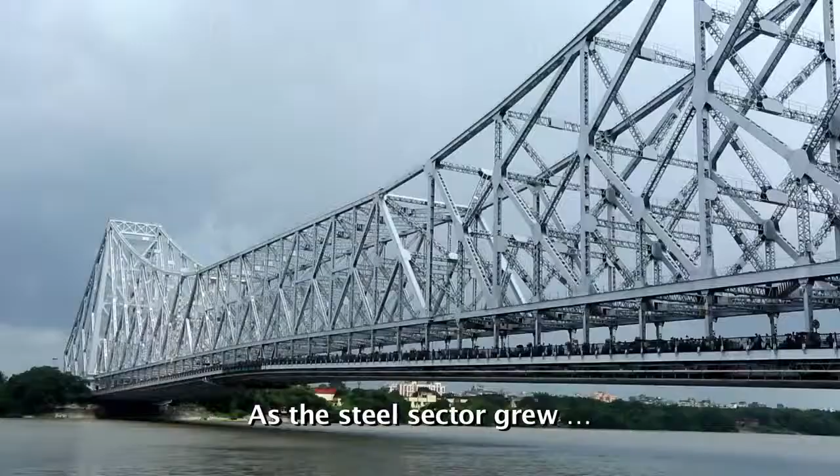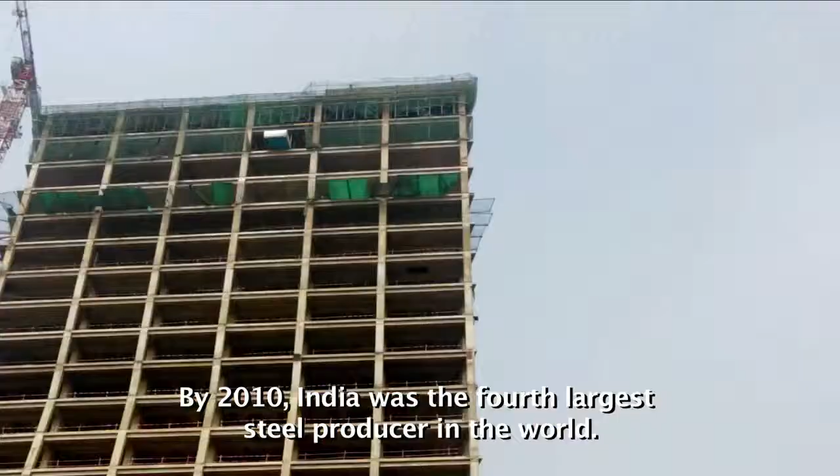As the steel sector grew, so did the nation. There's truly a bit of it in everybody's life. By 2010, India was the fourth largest steel producer in the world.

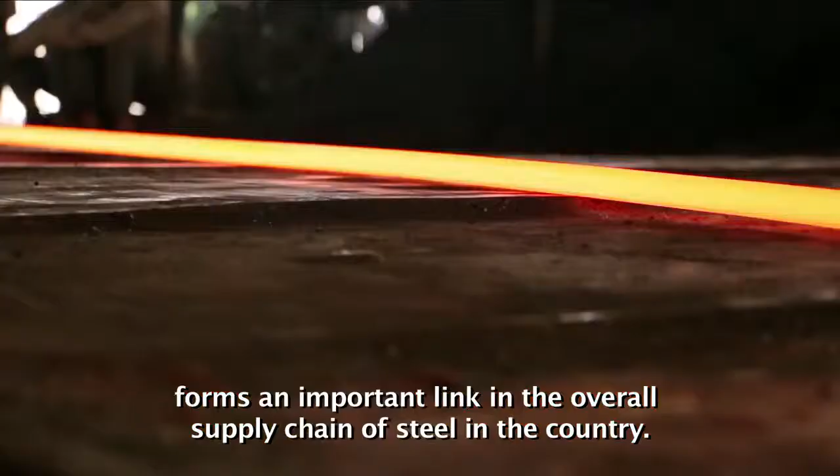The secondary steel re-rolling mill sector forms an important link in the overall supply chain of steel in the country. Much of the processing of long steel products takes place in these re-rolling mills. 1,800 such mills cater to infrastructural and industrial needs.

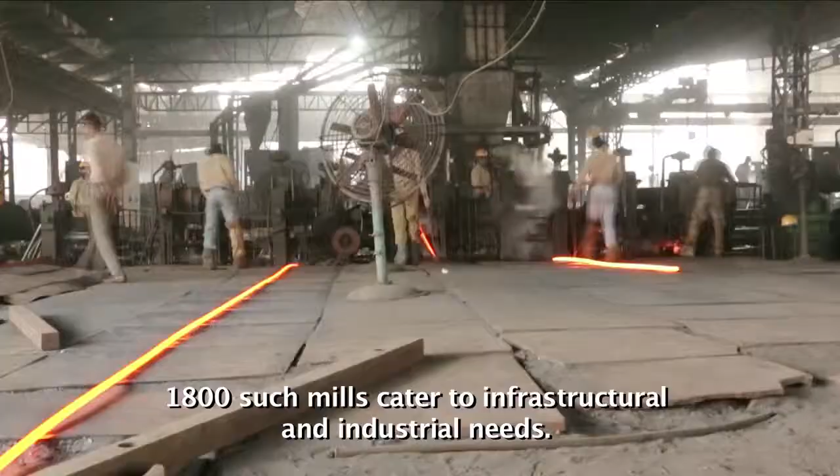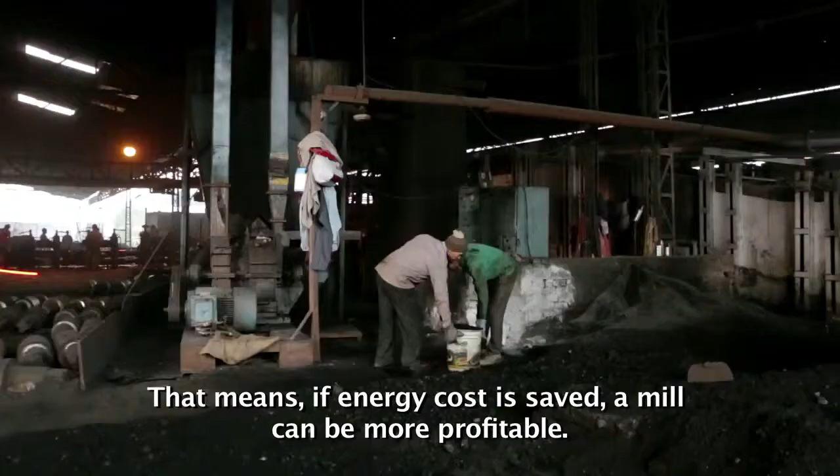A major portion of the operational costs of these mills goes into energy consumption. An analysis suggests that 30 to 40% of the processing cost goes into energy. That means if energy cost is saved, a mill can be more profitable. Additionally, the mill can bring down its greenhouse gas emissions.

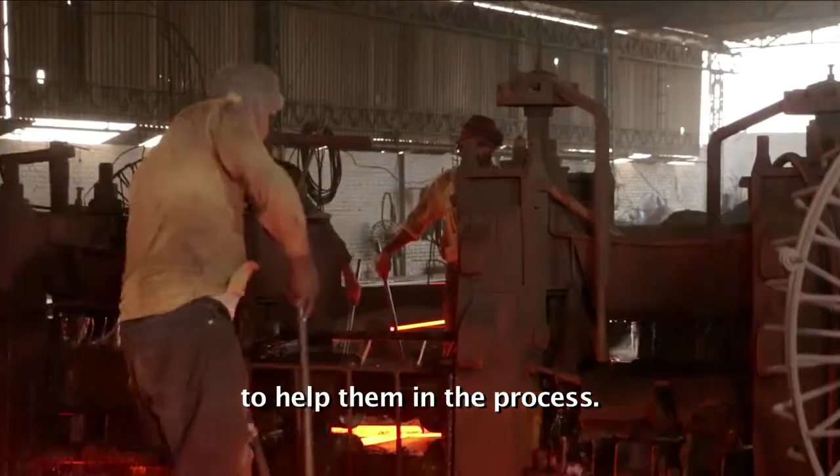However, a conventional mill is not well aware of the need of expertise and technology to help them in the process. Understanding the ground issues relating to energy efficiency, UNDP designed a project that will demonstrate energy efficiency, which can also save money to the steel mills. And these steel mills otherwise would have remained without such measures and would not have seen efficient functioning of the units.

Understanding this, the United Nations Development Programme and the Government of India's Ministry of Steel, with the support of Global Environment Facility, initiated a program to help steel re-rolling mills be energy efficient. Under this project, between 2004 and 2013, 34 SRRM units were transformed into model units. Now, with the support of AusAid, UNDP and the Ministry of Steel are aiming at upscaling energy efficiency in 300 steel units.

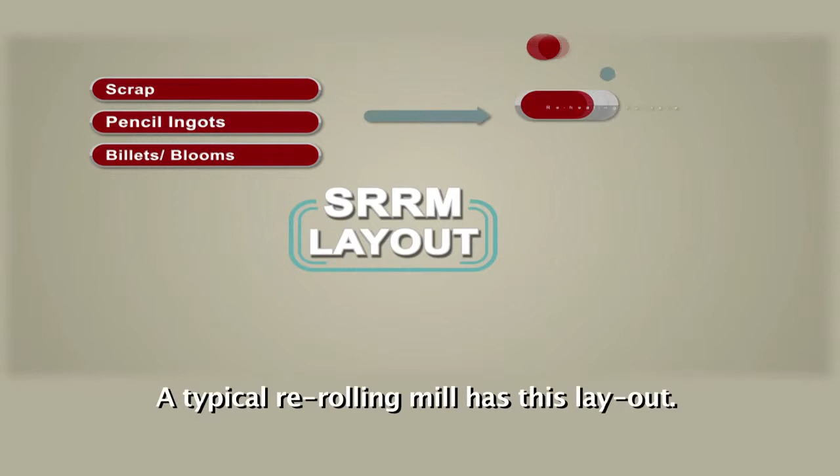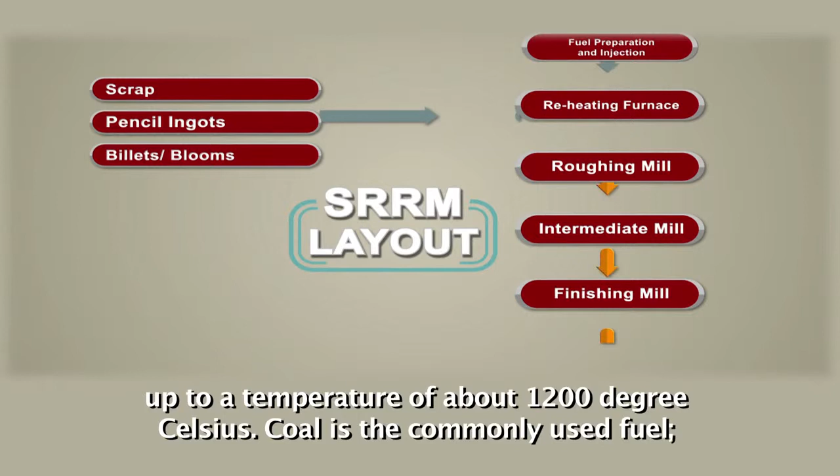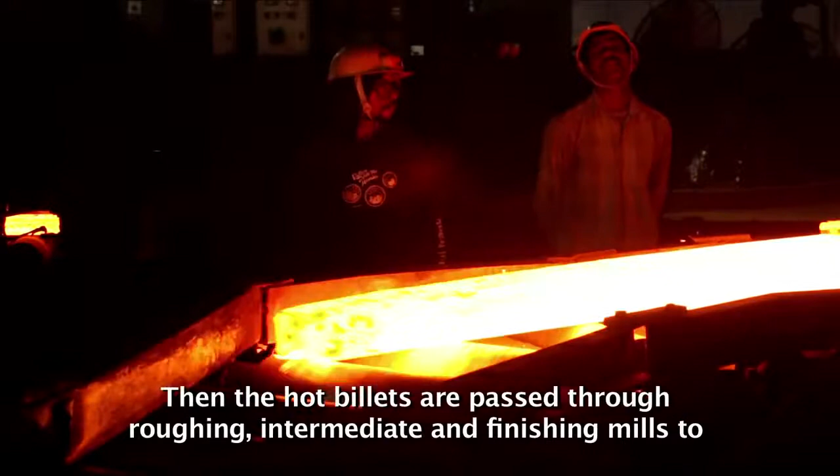A typical re-rolling mill has this layout. Scrap, ingots, billets, blooms are reheated in reheating furnace, where they are heated up to a temperature of about 1200 degrees Celsius. Coal is the commonly used fuel. Furnace oil, natural gas and biomass are other fuels used. Then the hot billets are passed through roughing, intermediate and finishing mills to convert it to desired shape and size. Here, electricity is used as the source of energy.

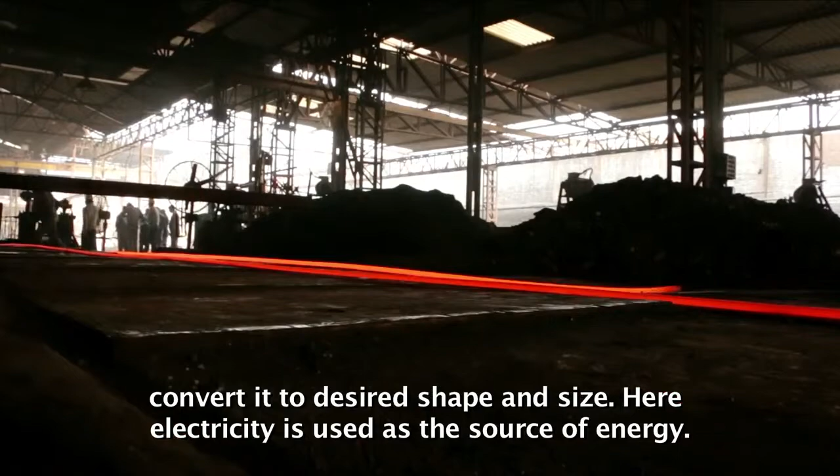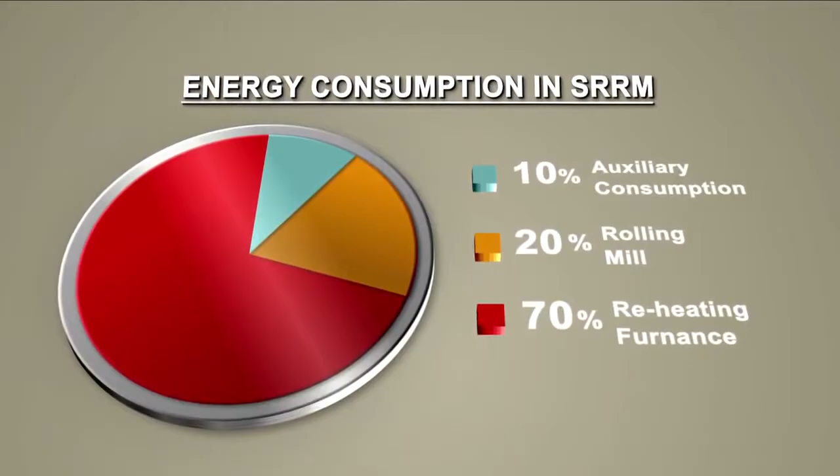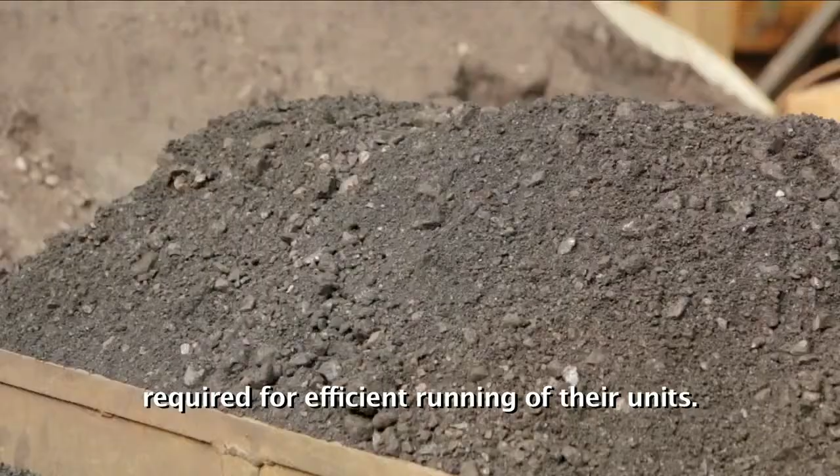An analysis of the energy consumption pattern shows that 70% of the energy is consumed by the reheating furnace. Most SRRMs use pulverized coal-based reheating furnace like this one. But often, manufacturers are unaware of the process and technologies required for efficient running of their units.

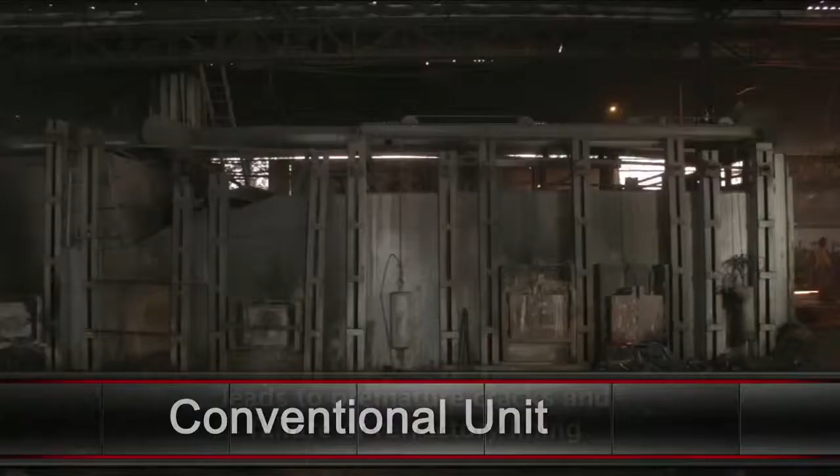An efficient process starts with the sourcing of coal. The ash content of the sourced coal varies from 5 to 25%. The calorific value ranges between 5,200 kilocalories per kg and 7,500 kilocalories per kg. Coal with high ash content, like in this conventional unit, leads to premature cracks and failure of refractory lining and ash deposits on surface of ingot or billet, which then needs more heat and hence consumes more fuel. This also creates more suspended particulate matter, SPM.

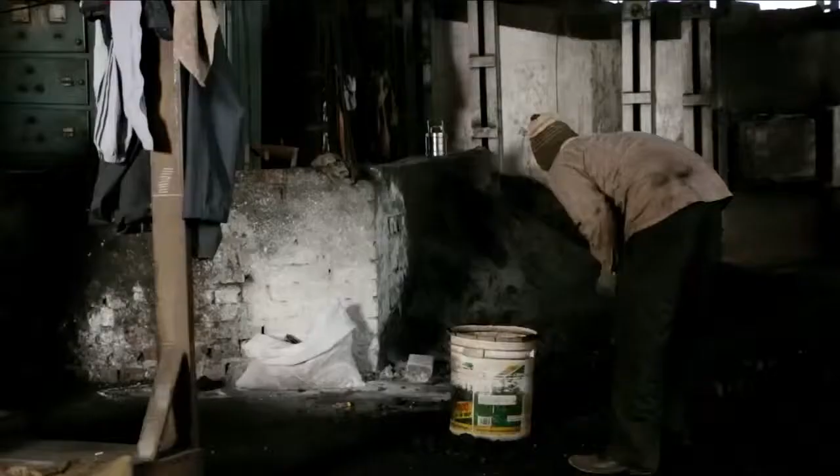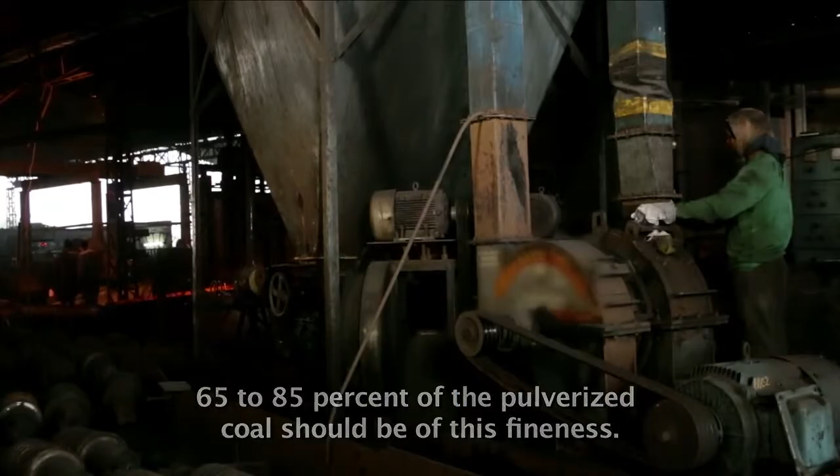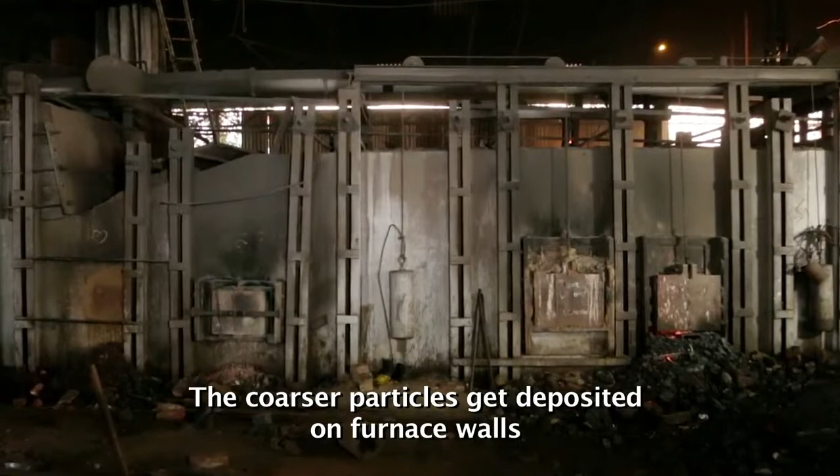The next step is pulverization of coal. The desired fineness of the pulverized coal is 75 microns. 65 to 85% of the pulverized coal should be of this fineness. The regular hammer-type pulverizer, like in this conventional unit, cannot yield the desired fineness. The coarser particles get deposited on furnace walls, or much of it escapes with flue gas or ash.

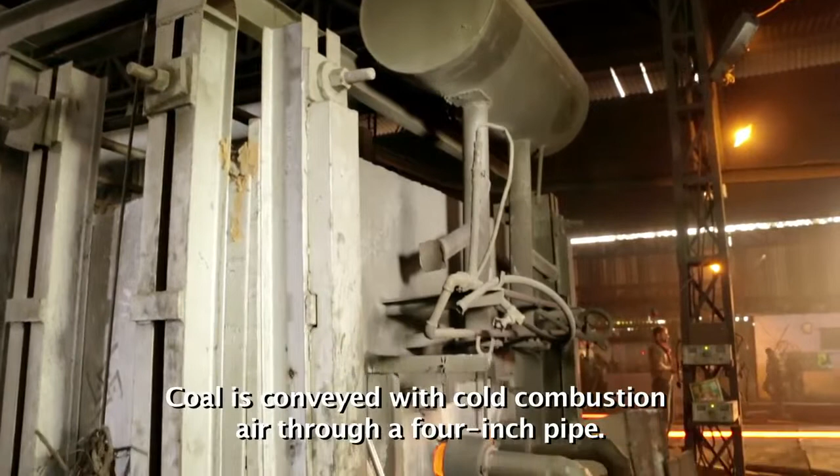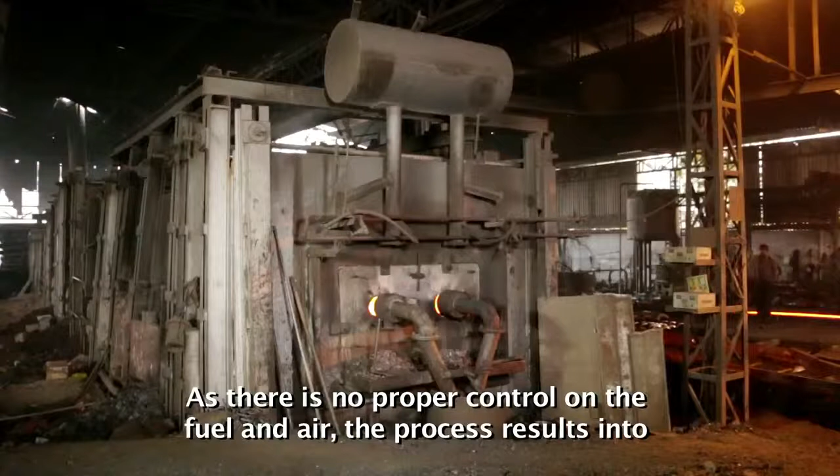Conventionally, the pulverized coal is stored in a hopper. Coal is conveyed with cold combustion air through a 4-inch pipe. The pipe also serves as the burner. As there is no proper control on the fuel and air, the process results in improper combustion. So much of the coal remains unburnt, jamming the pipe sometimes.

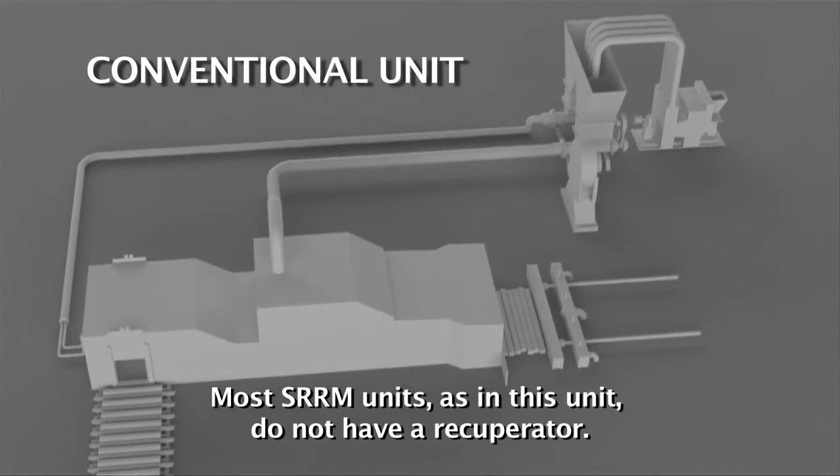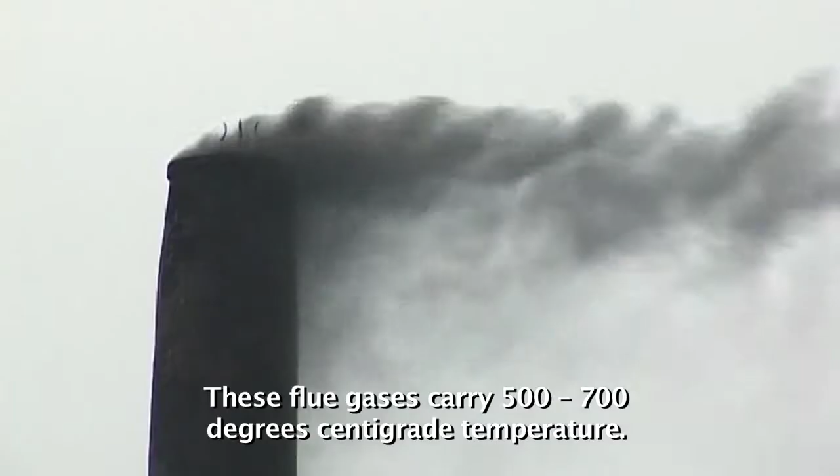Most SRRM units, as in this unit, do not have a recuperator. The lack of recuperator leads to higher energy consumption. A large amount of the heat supplied into the furnace is wasted in the form of exhaust flue gases. These flue gases carry 500 to 700 degrees centigrade temperature.

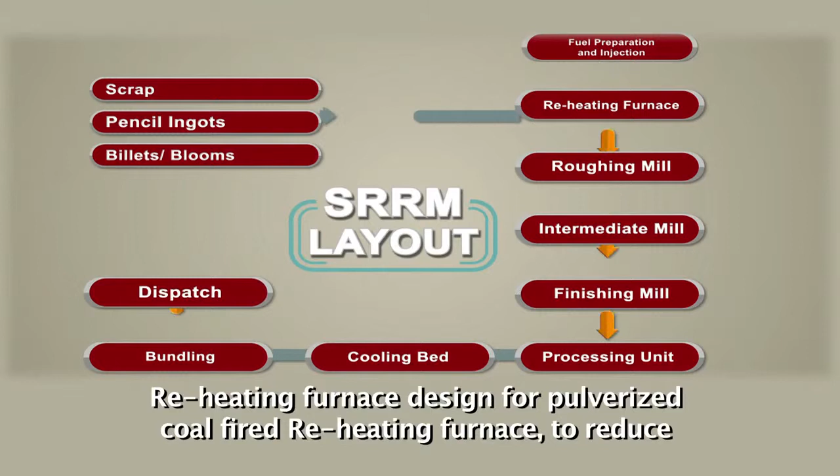The problem led the project to primarily target the fuel preparation process and the reheating furnace design for pulverized coal-fired reheating furnace to reduce energy consumption. In the modified system, the heat from the flue gas in pulverized coal-based reheating is reused. A significant number of the SRRM sector uses pulverized coal as fuel. So the challenge for the project was to develop a suitable technology which suits these units.

The most innovative technology which was developed under the project was the pulverized coal injection system. Stress was also given to improvise on other technologies like recuperator, pulverizer and swirl burners. To support this was the thumb rule which says every 20-degree rise in the combustion air preheat temperature leads to saving of 1% in the specific fuel consumption. The energy efficient technology and process were implemented in this model unit at Ludhiana. Now this unit stands as an example of energy saving.

In 2007, due to the rise in the fuel prices at that moment, we made a choice to switch over to coal. But at that moment of time, there was no specific technology that could fire coal efficiently into the furnace. That is when we came into contact with UNDP, and together we came up with innovative technologies that helped us to optimize the combustion of coal in the furnace.

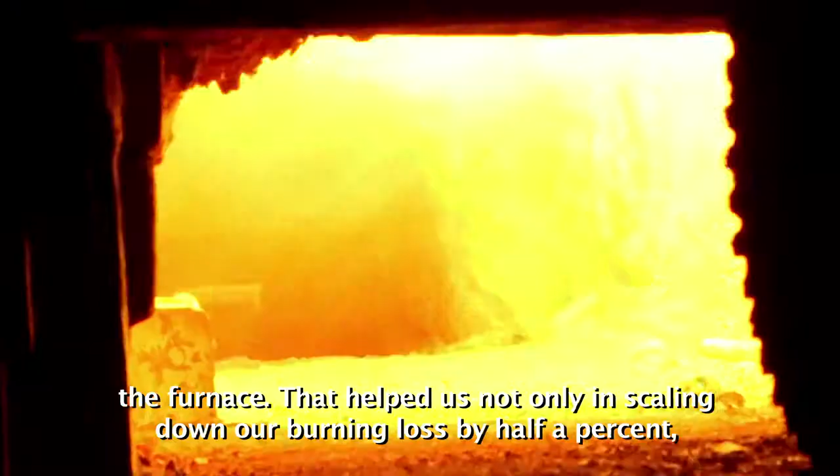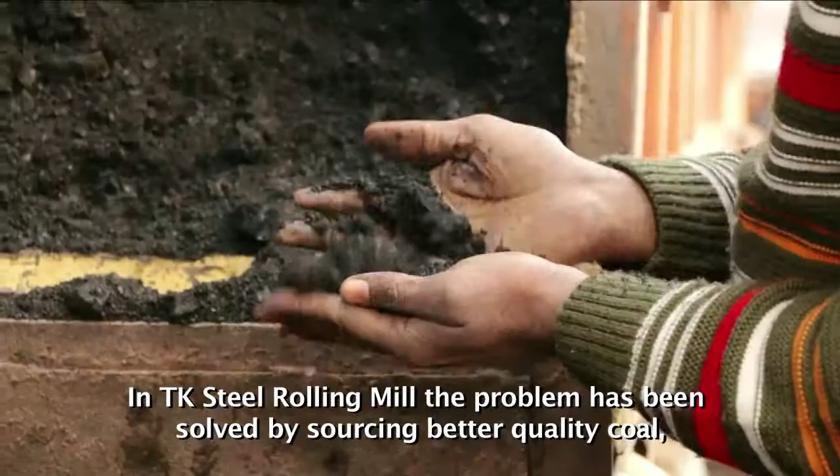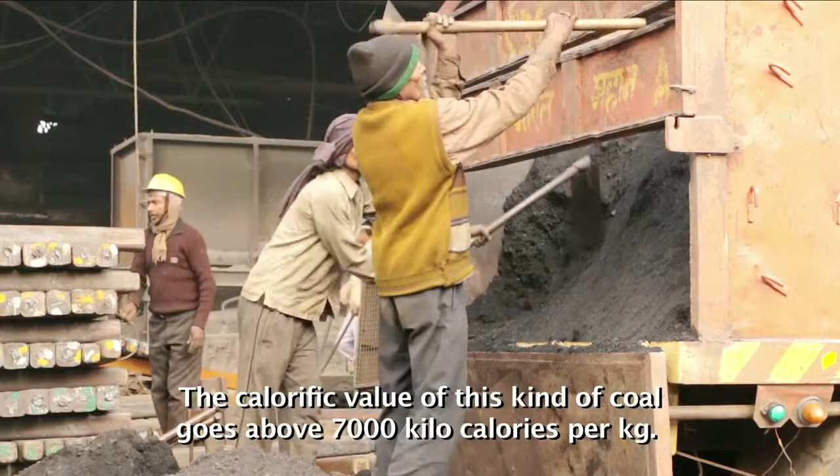That helped us not only in scaling down our burning loss by 0.5%, but also bringing down the specific fuel consumption by 25%. The process starts at the procurement of coal. In TK Steel Rolling Mill, the problem has been solved by sourcing better quality coal, which has an ash and moisture content of less than 10%. The calorific value of this kind of coal goes above 7,000 kilocalories per kg.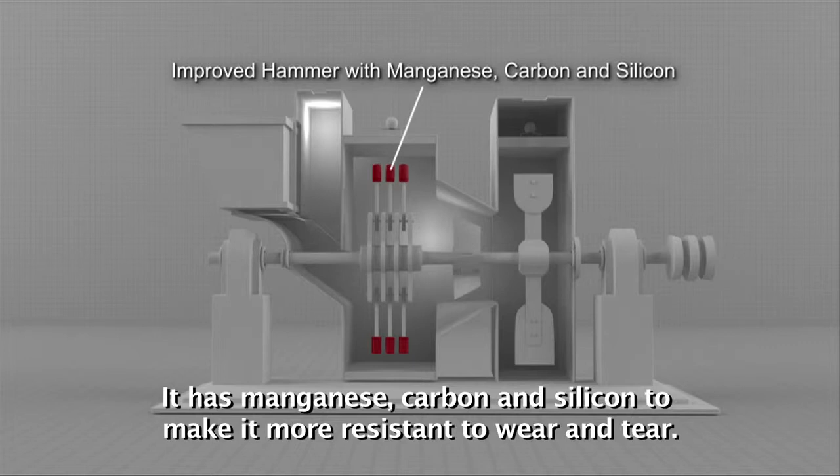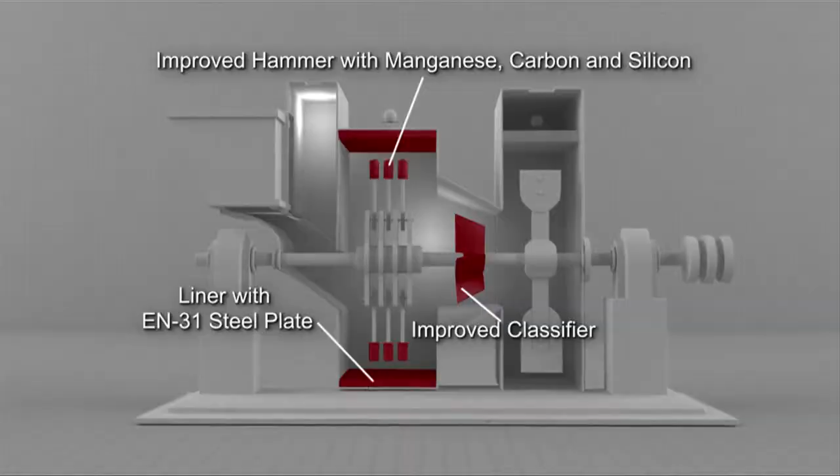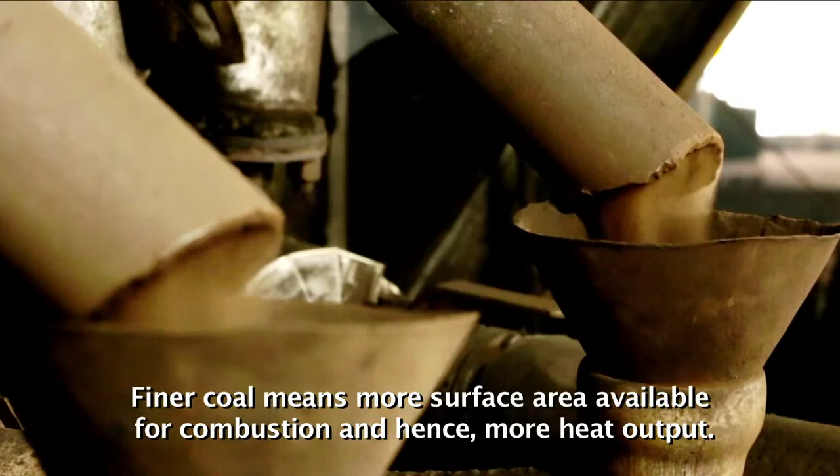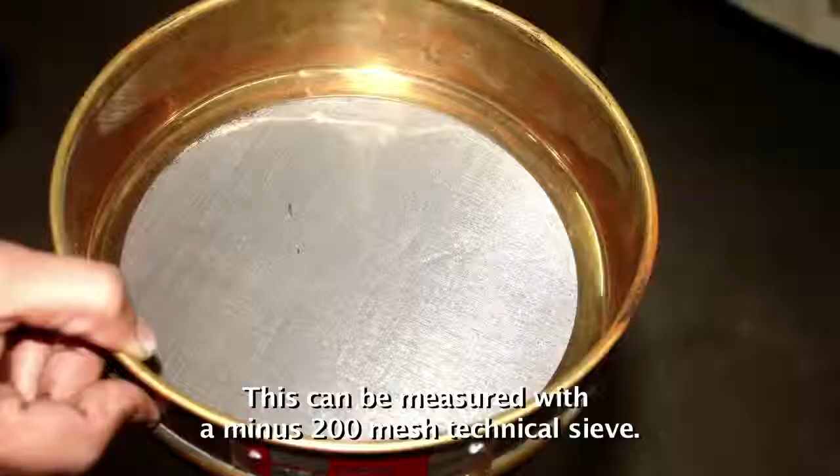The pulverizer assembled in this model unit has an improved hammer with metallurgical innovation. It has manganese, carbon and silicon to make it more resistant to wear and tear. The liner has an EN31 steel plate, and the classifier has been improved to achieve better fineness. Finer coal means more surface area available for combustion and hence more heat output. The desired fineness of the pulverized coal is 75 microns. This can be measured with a -200 mesh technical sieve.

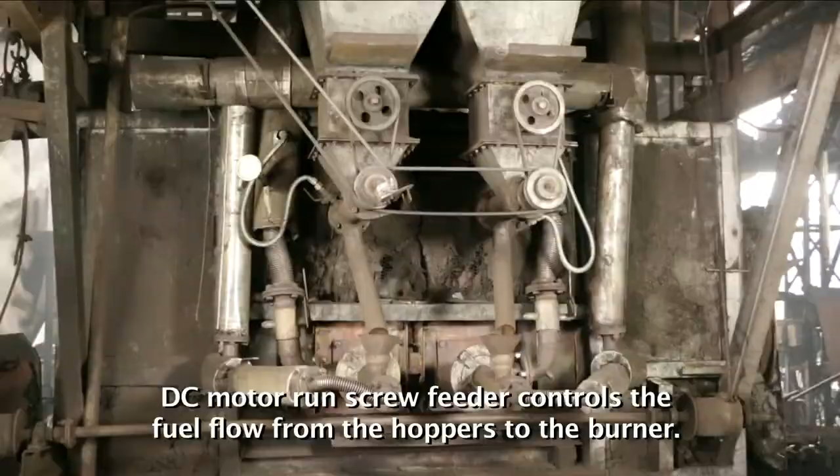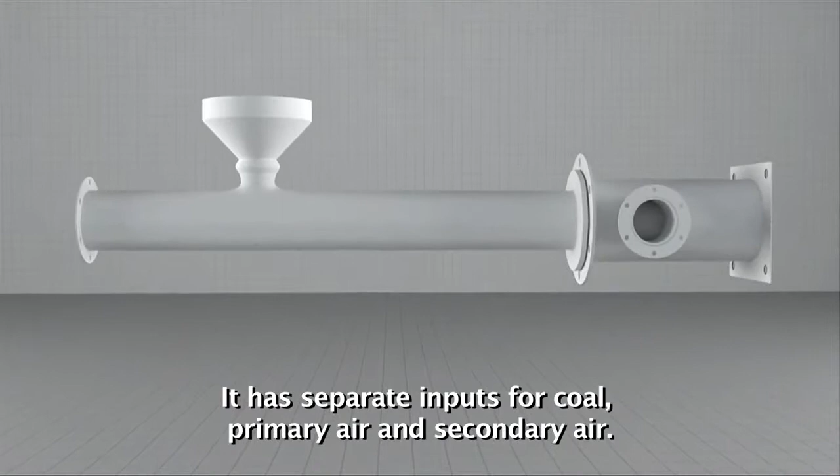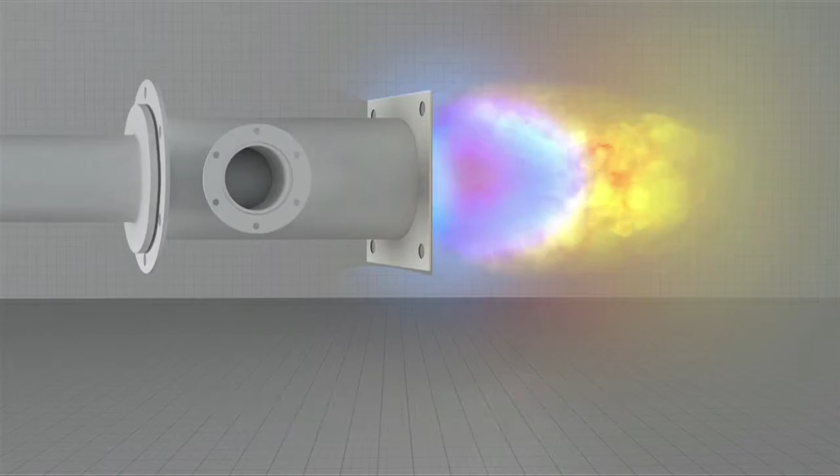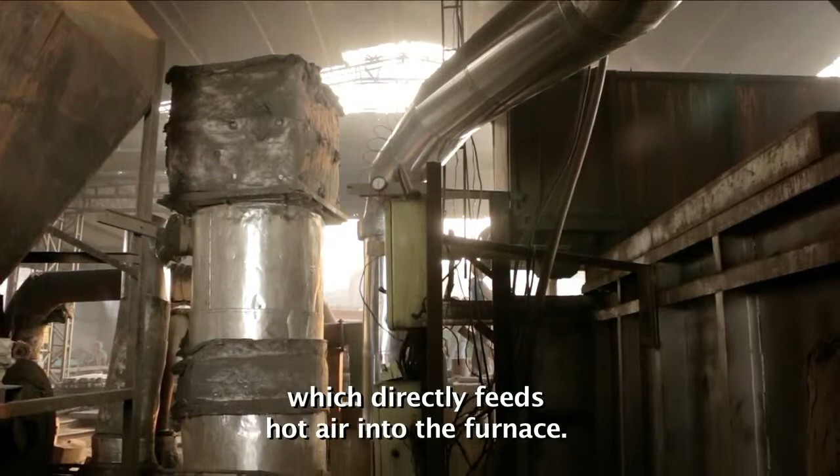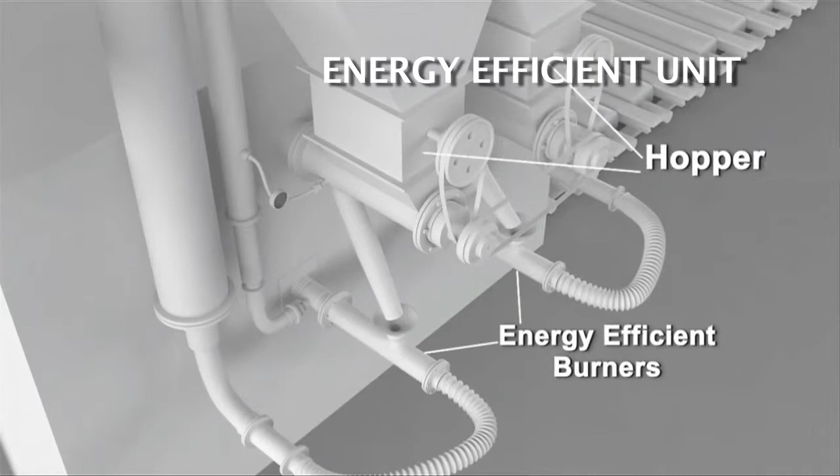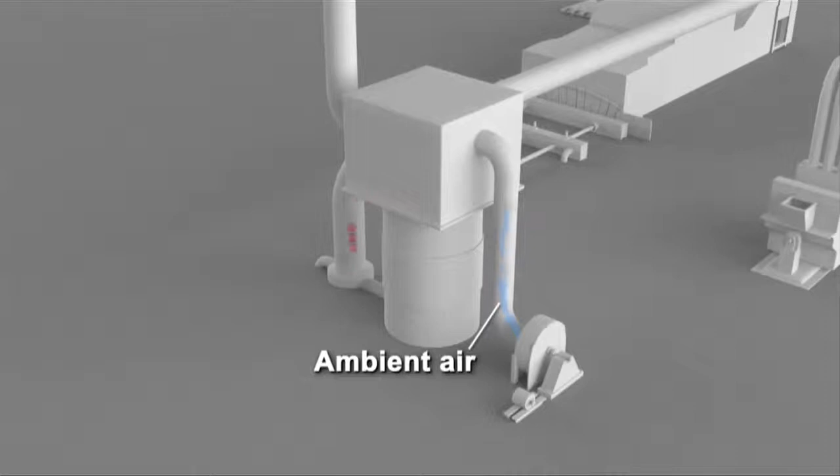Much of the efficiency is achieved by adding a recuperator. The recuperator recovers the wasted heat from the gas, which directly feeds hot air into the furnace. In this system, heat flows steadily through the wall from the flue gas to the cold combustion air. That is, hot air from the recuperator goes directly into the burner.

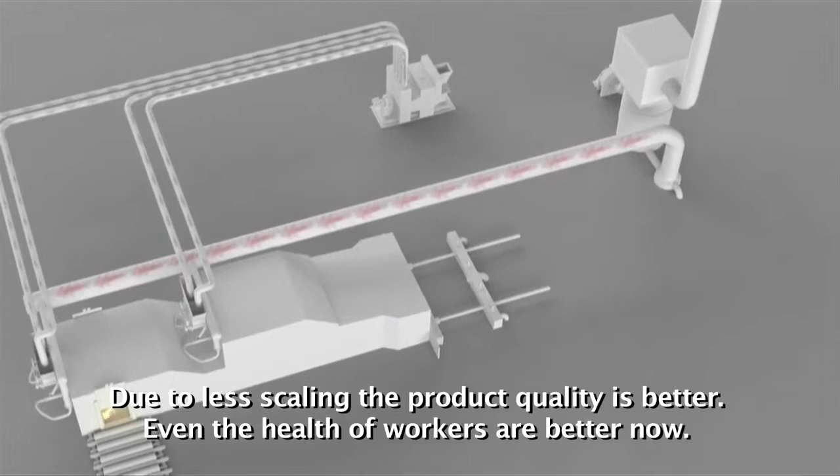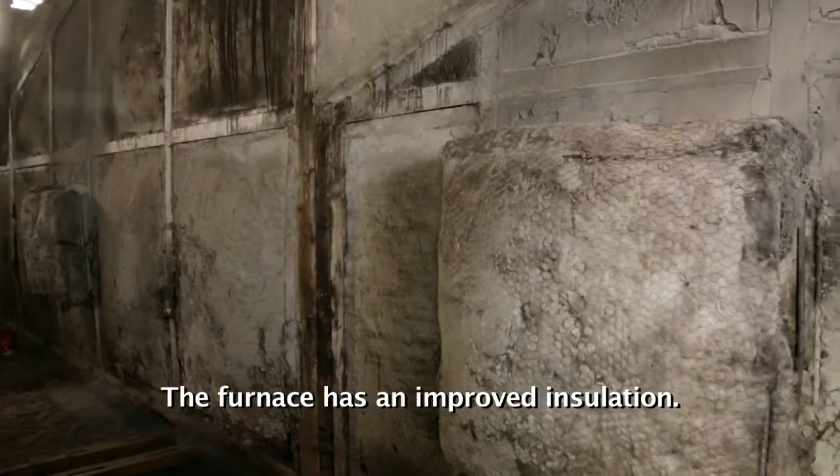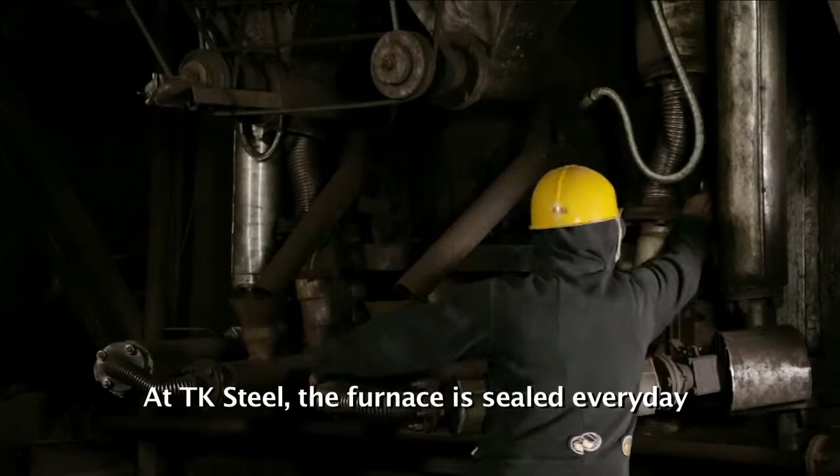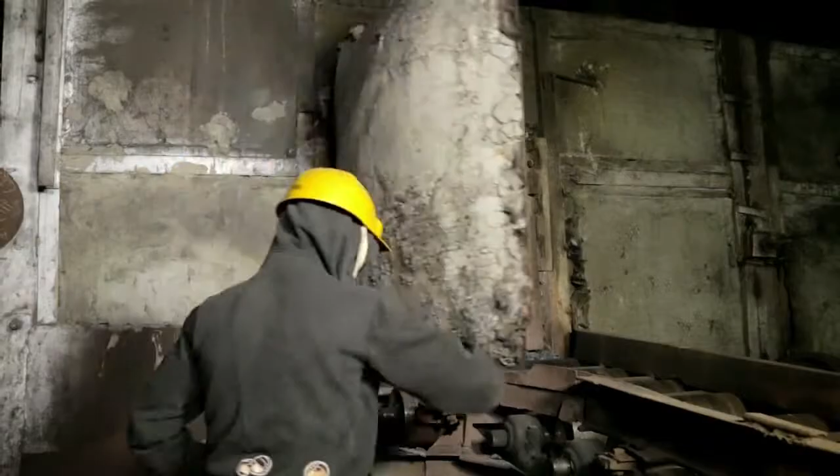The furnace has an improved insulation. It has an insulation of ceramic fiber blanket in the preheating zone. The side walls have bricks for optimum insulation. Also, a significant efficiency can be achieved with improved operational practice. At TK Steel, the furnace is sealed every day to maintain the temperature at 900 degrees centigrade during furnace shutdown. This means the next day the furnace can be started with less cold startup time.

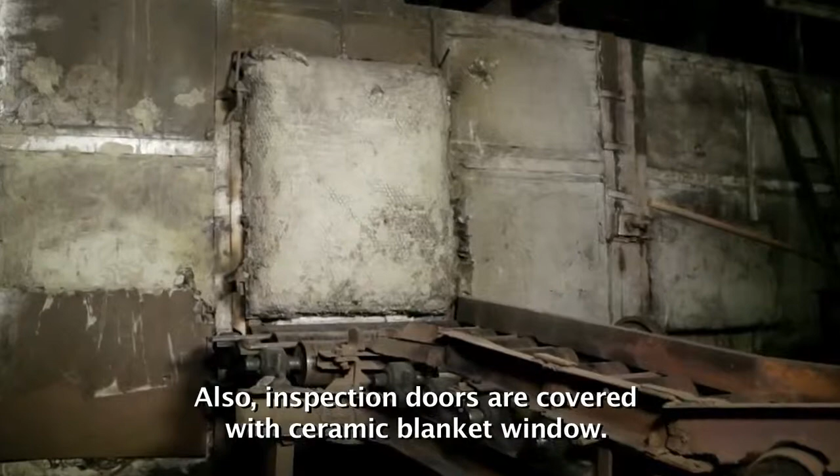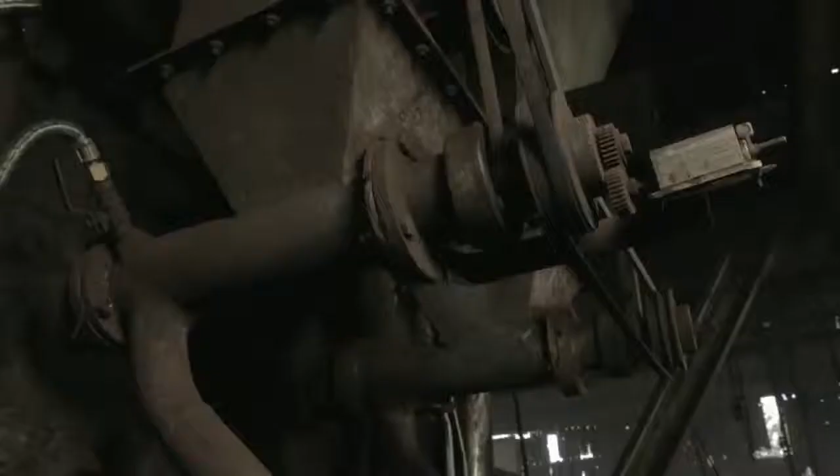Also, inspection doors are covered with ceramic blanket window. Regular training and orientation sessions are held for the plant personnel. An improved operational practice would mean better sustenance of energy-efficient production system. The unit has also implemented 5S principle for better housekeeping management. The cost implications of these energy-efficient units are minimal, considering the long-term benefits they yield.

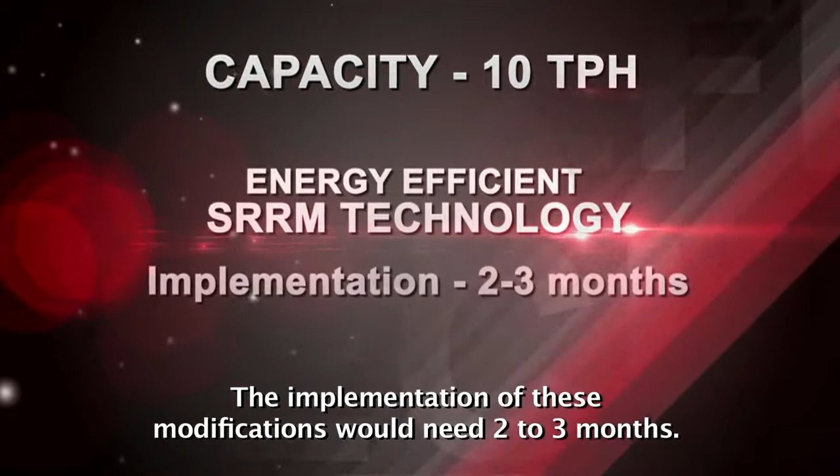Energy-efficient pulverizer of this capacity costs 4 to 6 lakh. Also, retrofitting of regular pulverizer can be done at Rs 50,000 to 70,000 for the desired properties. The modifications for fuel injections would cost Rs 2 to 3 lakh. The recuperator of this capacity would cost Rs 4 to 6 lakh. The implementation of these modifications would need 2 to 3 months. The estimated payback period for all of these technologies is less than 6 months.

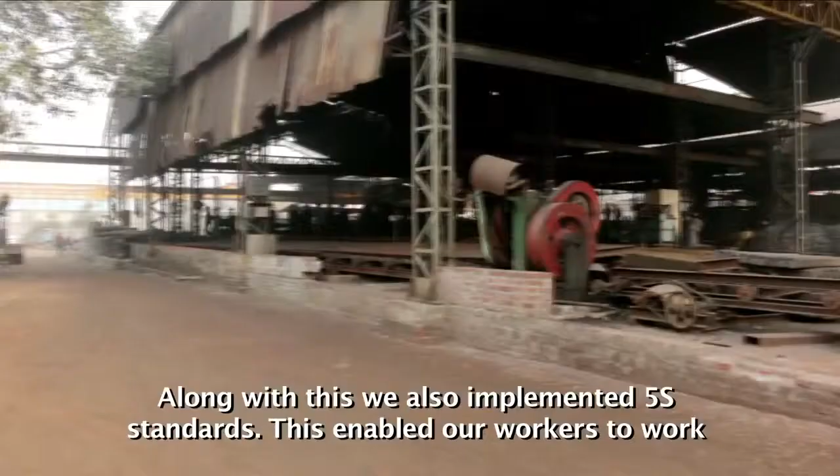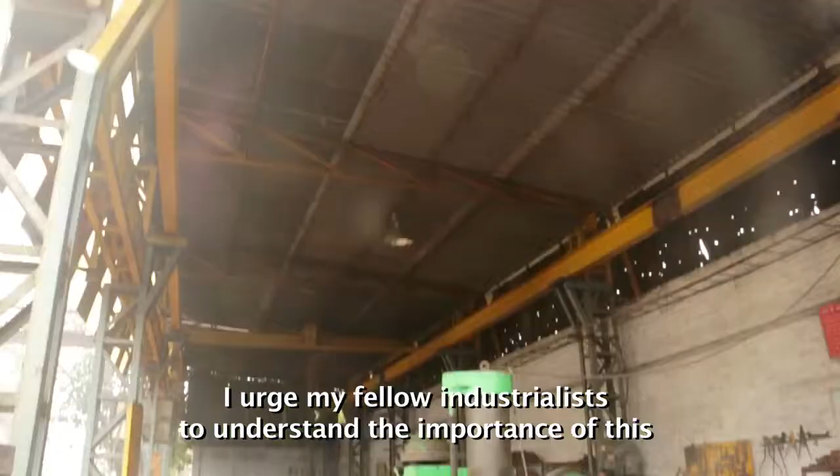This project, implemented by the Ministry of Steel and UNDP, helped us in implementing ISO 9001 and 14001 standards in our company. Along with this, we also implemented 5S standards. This enabled our workers to work in a friendly and healthier atmosphere, as well as helped us in achieving better productivity. I urge my fellow industrialists to understand the importance of this technology and try to implement the same in their units as soon as possible to reap the benefits of the same.

The previous UNDP-GEF project implemented energy efficient technologies in 34 model units across India, which led to huge energy savings. The present project builds on the previous project and aims to replicate these technologies in 300 re-rolling mills. Most importantly, the technologies identified under the project have a very significantly low payback period. By adopting these technologies, entrepreneurs can become more profitable and sustainable.

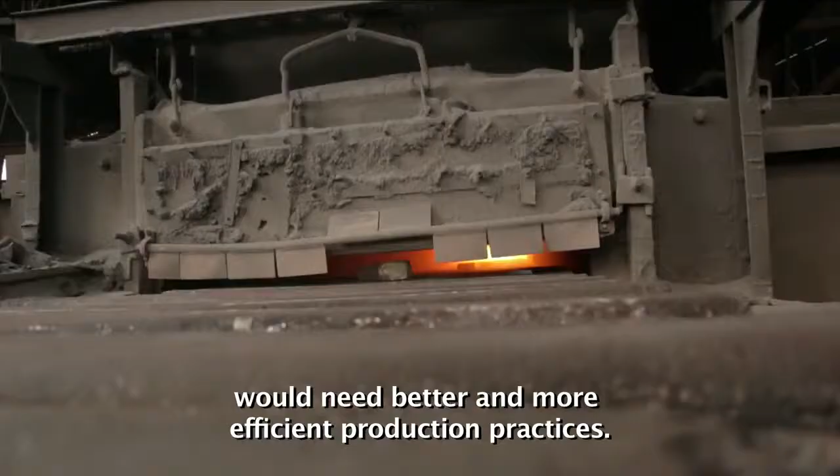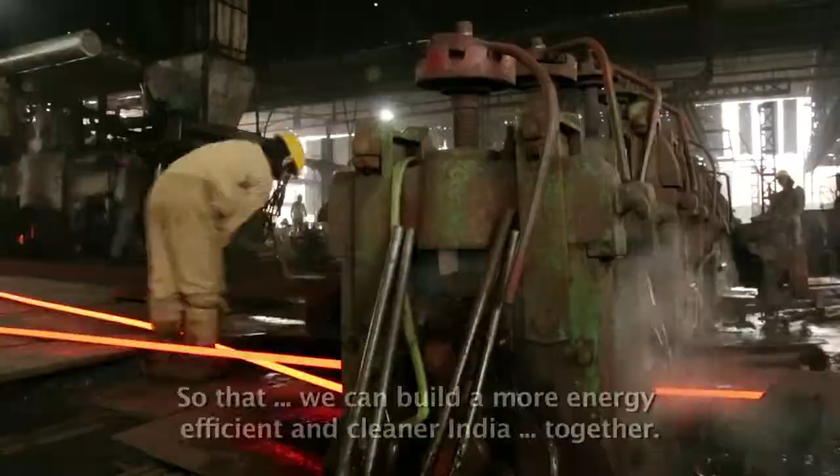As India grows, it needs more steel. The opportunity is constantly rising. However, taking advantage in a better market would need better and more efficient production practices. We welcome all SRRM mill owners to adopt the innovations for energy-efficient steel rolling process, so that we can build a more energy-efficient and cleaner India together.